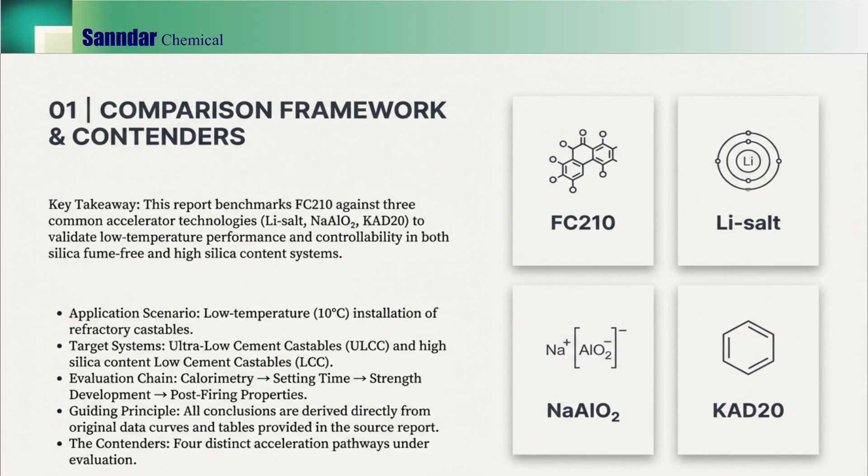This report follows a 5-stage validation logic from A to E. Stage A is Matrix I calorimetry, used to establish an intrinsic acceleration fingerprint in a silica fume-free environment. Stage B is Matrix II calorimetry, which stress tests robustness in a high silica environment with dispersant.

Stage C is a dose response study to define an operational low dosage window. Stages D and E are full application trials at 10 degrees Celsius, first in ULCC then in high silica LCC, to close the loop from mechanism to engineering performance.

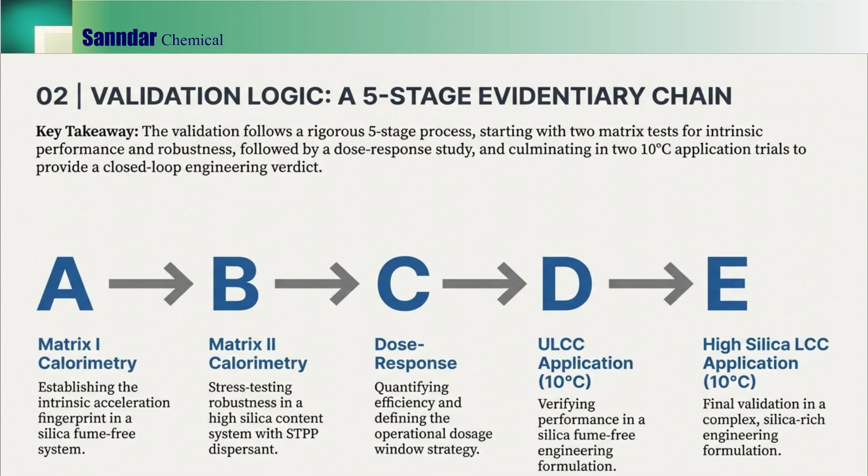Matrix I is designed to isolate intrinsic acceleration behavior by eliminating high silica interference. The system uses alumina and CA71 cement with a fixed dispersant, and the accelerator is the only variable. The objective is to compare fundamental acceleration potential across contenders.

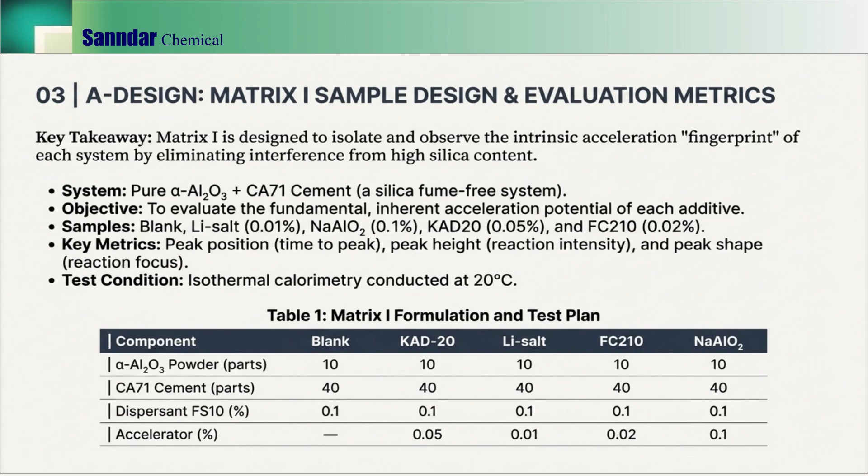We focus on peak position, time to peak, peak height, and peak shape in isothermal calorimetry at 20 degrees Celsius. Under these test conditions, this matrix sets the baseline for interpreting later setting window and strength acceptance results.

This page translates peak behavior into engineering meaning. In general, an earlier and more concentrated peak corresponds to a shorter induction period, faster setting, and quicker early structure development. However, under these test conditions, calorimetry alone is not enough to confirm field usability.

A very strong acceleration pathway can also compress the working window and create control risks. The key engineering question becomes, can we achieve acceleration with a controllable window? That is why the next step is a robustness test in a high silica environment.

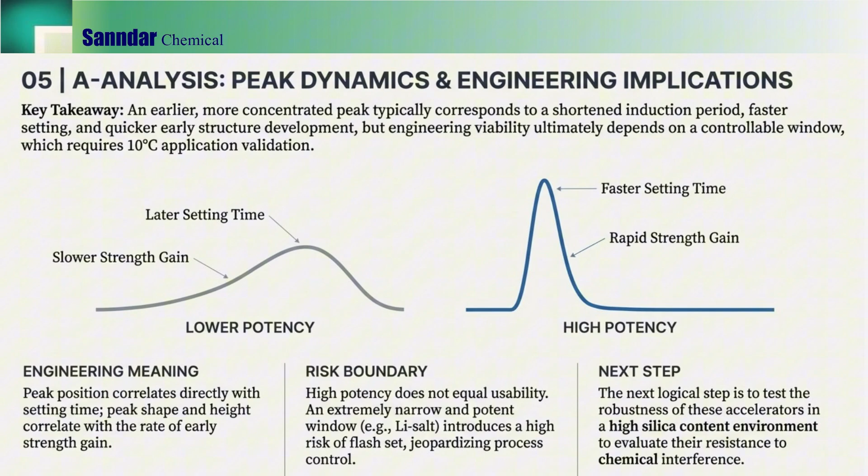Matrix II introduces a high silica and dispersant environment to test chemical robustness. We add reactive silica and use STPP as the dispersant, which better simulates a practical LCC chemical environment. Many acceleration routes can look strong in a clean system but become passivated or destabilized in silica-rich systems.

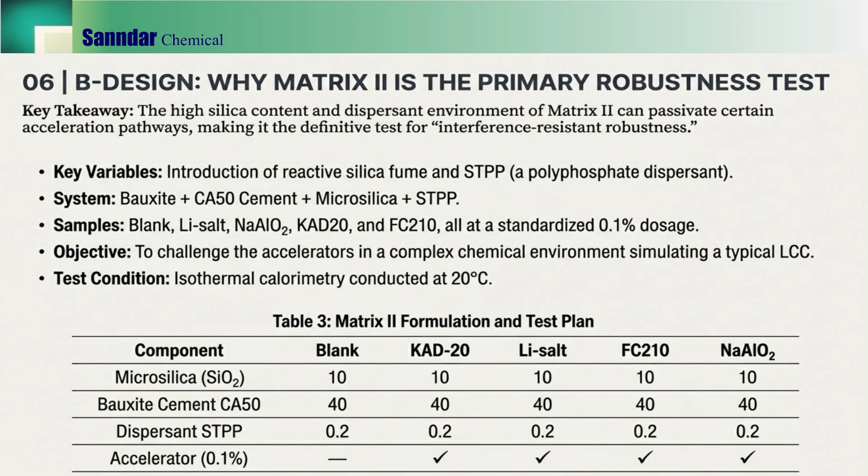Under these test conditions, Matrix II is designed to expose interference resistance, and to detect whether an accelerator keeps its effect, weakens, or even reverses direction. These are the Matrix II calorimetry curves.

Under these test conditions, the lithium salt curve nearly overlaps with the blank, meaning its heat flow signal is essentially neutralized. In contrast, FC210 still shows a distinct and early exothermic peak, demonstrating robust performance maintained in the high silica environment.

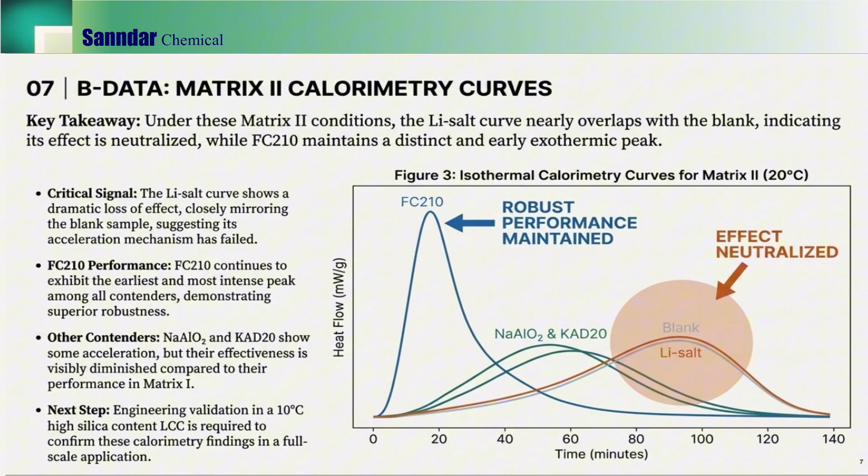NaAlO2 and KAD20 show some acceleration, but their peaks are visibly weaker or less advanced than FC210. This page clearly separates robust from neutralized behavior. This page explains the most critical risk in high silica systems.

Performance reversal. Under these test conditions, if an accelerator's mechanism is passivated by side reactions with reactive silica or dispersant chemistry, the practical outcome may not be just slower, it can manifest as significant retardation of setting in the final castable. That is an engineering red line, because it causes process instability and loss of controllability.

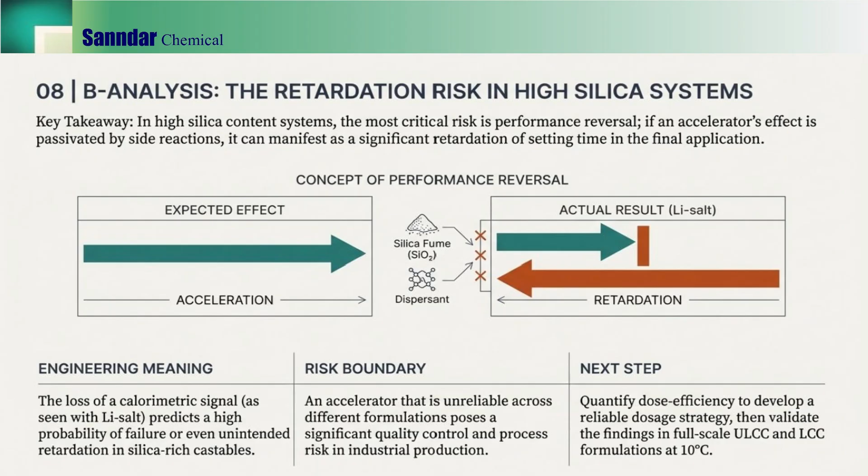The next steps, therefore, quantify dose efficiency and validate full-scale performance in both ULCC and high silica LCC at 10 degrees Celsius. Now we move to the dose-response design to compare efficiency per unit dosage.

Under these test conditions, we study KAD20, FC210, and NaAlO2 across 4 dosage levels: 0.2%, 0.4%, 0.6%, and 0.8%, using Matrix I calorimetry at 20 degrees Celsius. Lithium salt is excluded from this stage because its operational window is extremely narrow and high risk, as indicated by its flash setting tendency in applications.

The output goal is a data-driven, low-dosage window strategy that balances performance with control and reproducibility.

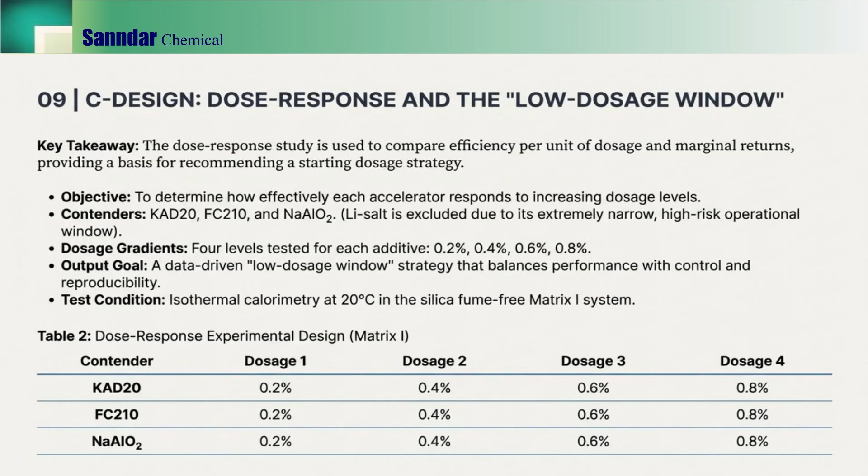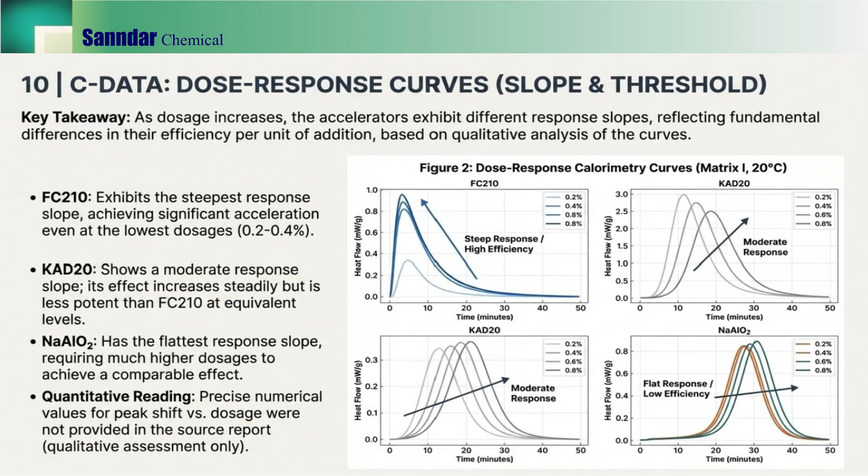A key boundary note: precise numerical values of peak shift versus dosage were not provided in the source report, so this is a qualitative curve-based comparison. This page turns the curves into an adoption strategy. Under these test conditions, an effective strategy must hit the final setting target while maintaining a practical flow window, and it must avoid flash set and performance volatility to ensure reproducible field results.

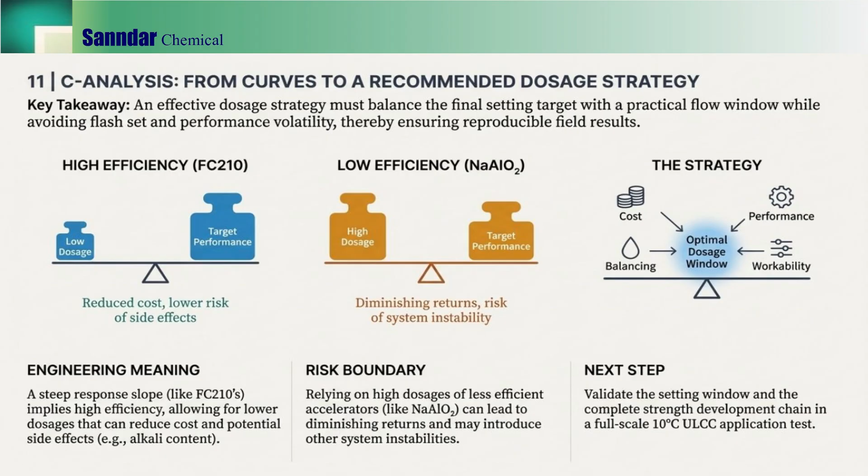High-efficiency pathways like FC210 can reach target performance at lower dosage, which reduces cost and potential side effects. Low-efficiency pathways, like NaAlO2 in this comparison, often push toward higher dosage with diminishing returns and higher risk of system instability. The next step is to validate the full setting and strength chain in a 10 degrees Celsius ULCC application test. Now we enter the 10 degrees Celsius ULCC application test.

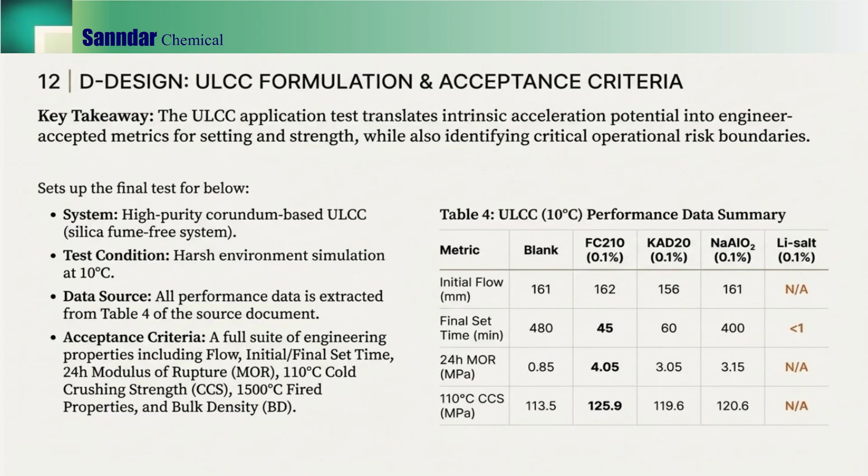Under these test conditions, the ULCC formulation is a high-purity, corundum-based system. We evaluate a full set of engineering acceptance criteria: initial flow, final setting time, 24-hour MOR, 110 degrees Celsius dried cold crushing strength, and post-firing properties at 1500 degrees Celsius. The purpose is to translate intrinsic acceleration potential into practical performance while identifying operational risk boundaries.

This page shows flow and final setting time in ULCC at 10 degrees Celsius. Under these test conditions, the blank control has a final set time of about 480 minutes. FC210 at 0.1% reduces final set time to 45 minutes, with negligible impact on initial flow, essentially maintaining workability. Lithium salt at 0.1% causes flash set in less than 1 minute, making the material unusable.

NaAlO2 at 0.1% reduces final set to 400 minutes, and importantly, a lower dosage of 0.03% causes significant retardation, with final set around 460 minutes. KAD20 at 0.1% achieves a 60-minute final set, but with a tangible loss in initial flow.

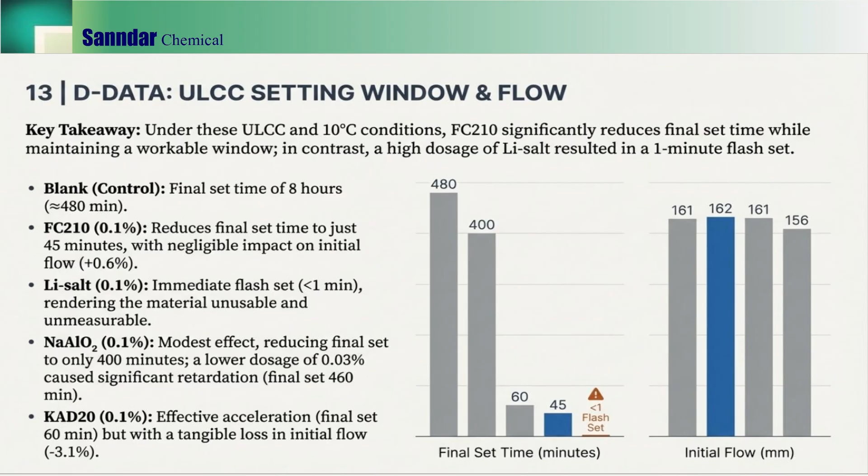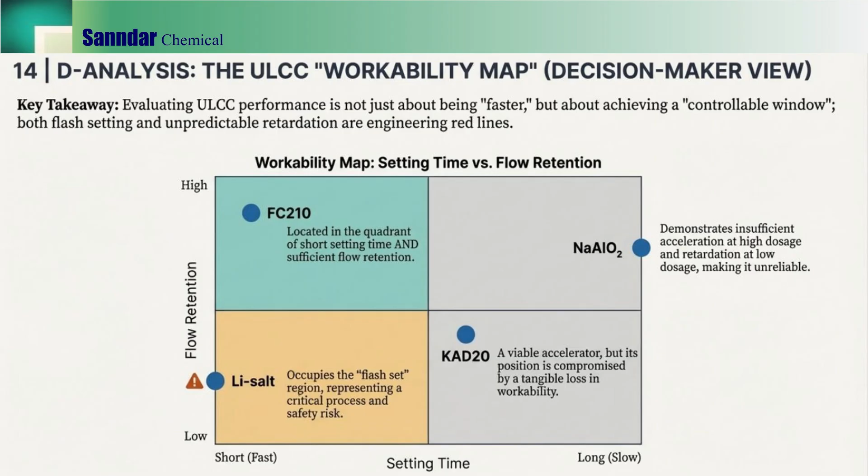Now we look at the strength chain in ULCC. Under these test conditions, the 24-hour MOR increases from 0.85 megapascals for the blank to 4.05 megapascals for FC210, which is about a 376% increase. KAD20 reaches 3.05 megapascals, and NaAlO2 reaches 3.15 megapascals.

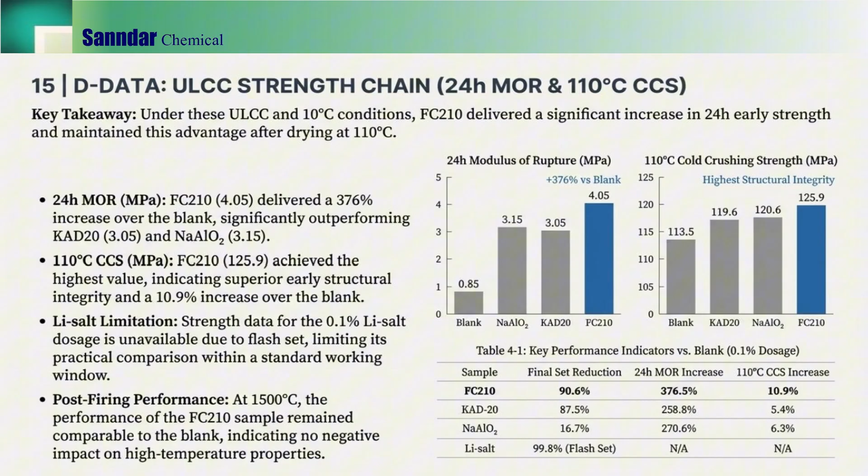For 110 degrees Celsius dried cold crushing strength, the blank is 113.5 megapascals, while FC210 reaches 125.9 megapascals, about a 10.9% increase. Lithium salt is not comparable here due to flash set, which eliminates a usable working window.

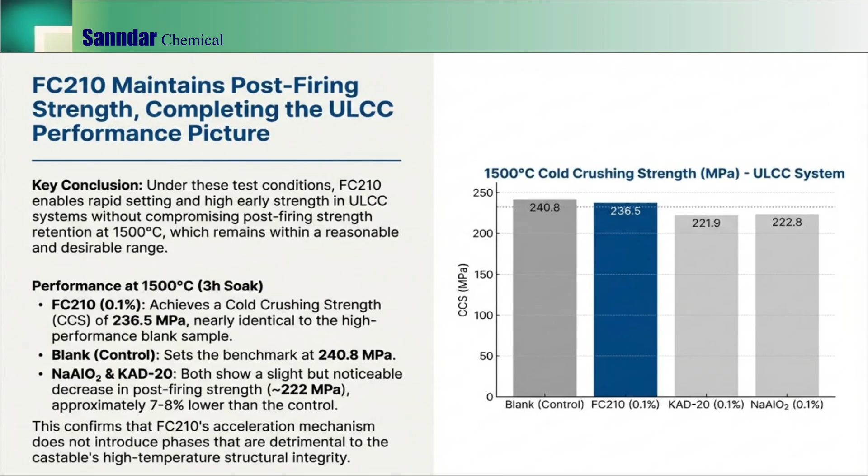This page closes the ULCC loop. Under these test conditions, the evidence chain is coherent. Calorimetry explains intrinsic potency. The setting window confirms field usability. Strength results prove engineering value, and post-firing data checks long-term integrity. FC210 forms a closed loop with correct direction, controllable window, strong early strength gain, and stable post-firing retention.

It also illustrates an important boundary. Potent does not always mean usable. Lithium salt can be potent in calorimetry, but flash setting makes it unusable in practice. Next, we move to high silica LCC to validate robustness and direction risk. This section validates performance in a complex, silica-rich LCC system at 10 degrees Celsius.

The objective is to evaluate accelerator behavior in a bauxite-based LCC containing a high level of silica fume, a known challenge environment. Under these test conditions, we ask two questions. Does the accelerator maintain effectiveness in the presence of reactive silica and chemical dispersants? And is there any risk of effect reversal that would cause retardation instead of acceleration?

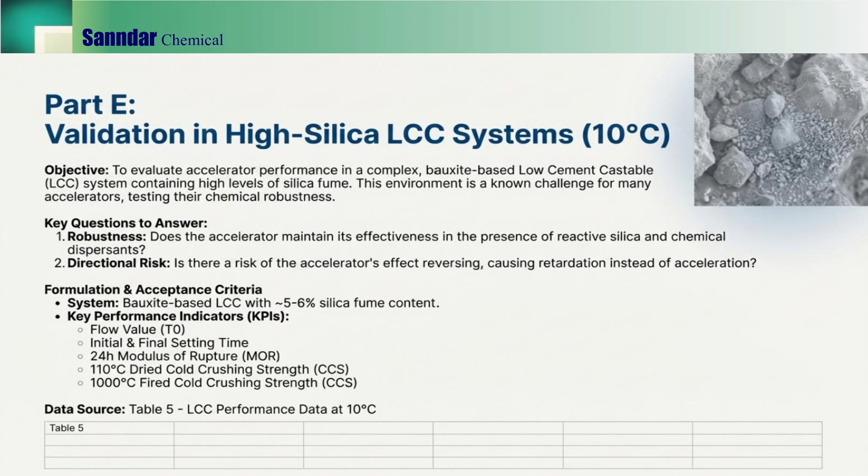We evaluate flow, initial and final setting time, 24-hour MOR, 110 degrees Celsius dried CCS, and 1000 degrees Celsius post-firing CCS. This page shows the most critical result in high silica LCC, the direction of final setting time. Under these test conditions at 0.1% dosage, FC210 reduces final set time from 300 minutes to 100 minutes, a 67% reduction. KAD-20 and NaAlO2 are also effective, bringing final set time to roughly 120 to 130 minutes.

In stark contrast, lithium salt fails completely, extending final set time to 480 minutes, which is significant retardation and a critical process failure. For workability, the initial flow stays within an acceptable band, but KAD-20 shows the largest flow loss. FC210 and NaAlO2 show moderate flow loss, while lithium salt shows flow loss as well, but its main failure mode is significant retardation.

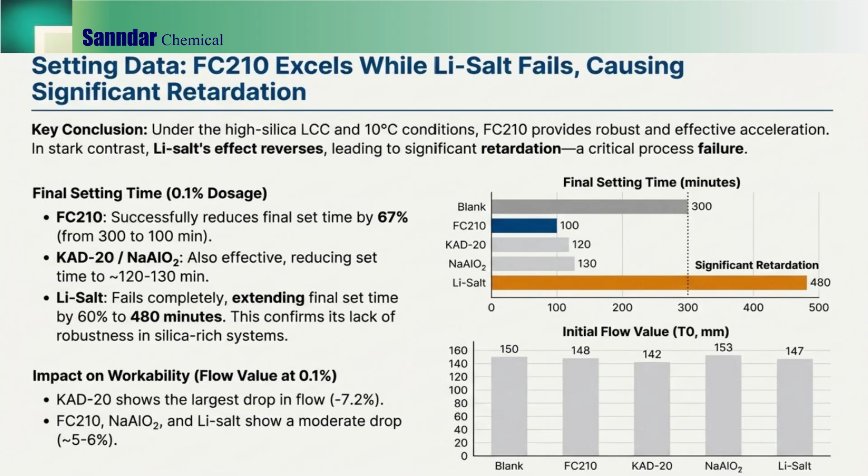Now we compare early and dried strength gains in high silica LCC. Under these test conditions, FC210 delivers the highest early and dried strength. The 24-hour MOR increases from 1.60 megapascals for the blank to 4.38 megapascals for FC210, a 174% increase. KAD-20 reaches 4.01 megapascals, and NaAlO2 reaches 4.02 megapascals, both around 151% increase. Lithium salt reaches only 2.10 megapascals, a 31% increase.

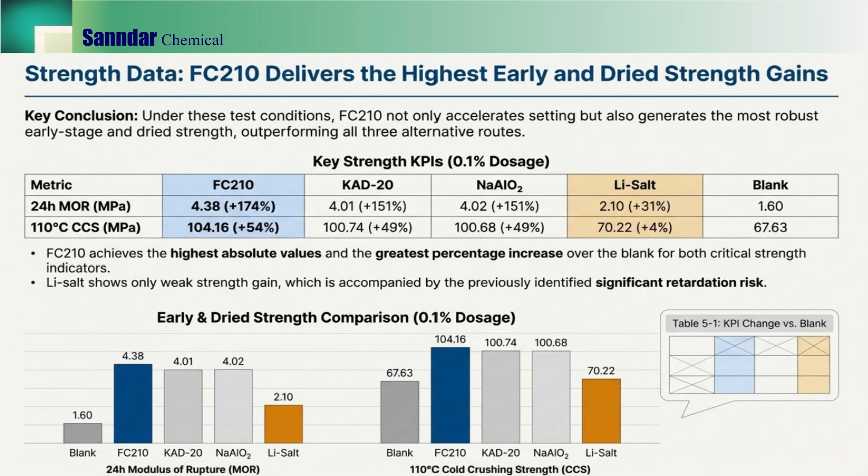This page verifies whether the advantage extends to post-firing strength at 1000 degrees Celsius. Under these test conditions, FC210 achieves the highest post-firing CCS at 115.4 megapascals. NaAlO2 and KAD-20 also show good retention, reaching around 113 to 114 megapascals. The blank is 105.8 megapascals, and lithium salt is 103.2 megapascals. This completes the performance picture in the high silica LCC system, confirming that FC210 provides best-in-class performance from setting control through early strength and into high temperature strength retention.

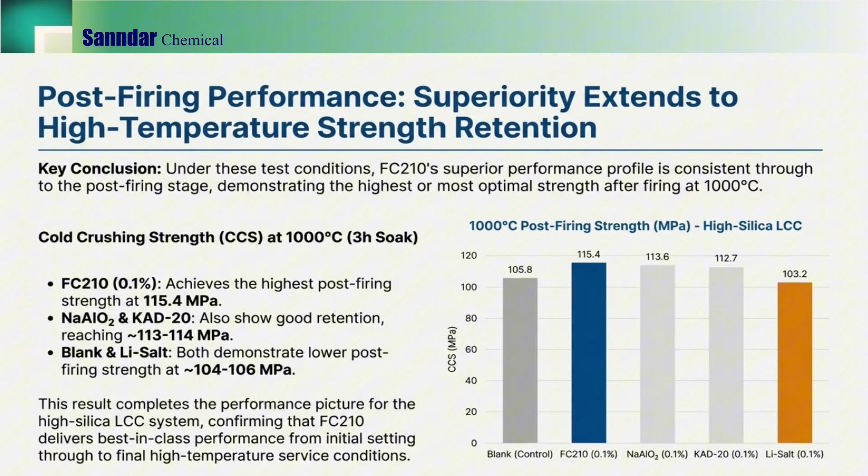This page provides a structured comparison across key dimensions. Under these test conditions, FC210 is the comprehensively superior and most balanced option. It delivers controlled acceleration with a 100-minute final set, the highest 24-hour MOR gain at 174%, the highest 110 degrees Celsius CCS gain at 54%, and the best post-firing retention at about 115 megapascals. It also supports a wide controllable dosage window and shows strong robustness proof in Matrix 2.

KAD-20 and NaAlO2 show effective acceleration and strength, but each compromises flow retention and has narrower operational boundaries. Lithium salt is not recommended. It shows flash set in ULCC, significant retardation in LCC, and no signal in Matrix 2, indicating poor robustness.